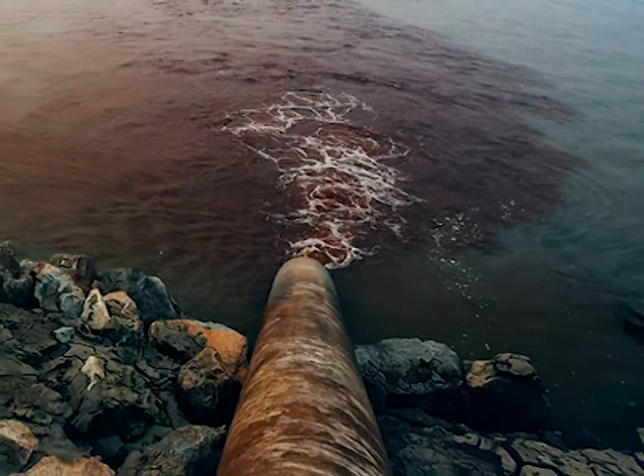Cheated? Please cool down, mother, and explain us in detail. See the condition of mine. You have taken out all my precious jewelries and spent all of them only on development of yours and had never cared to return me the same. Do you call it development by creating air and water pollution? Do you know the side effects of such pollution?

Wait, my son, I will tell you a fact. There are many consultants, experts, and learned humans who take the responsibility to control water pollution and build up an effluent treatment plant. But while selecting the machineries, they never evaluate the systems properly and the manufacturers fool them. Fool us? Can you please explain us in detail? Sure, my son. Now we will take the example of ETP.

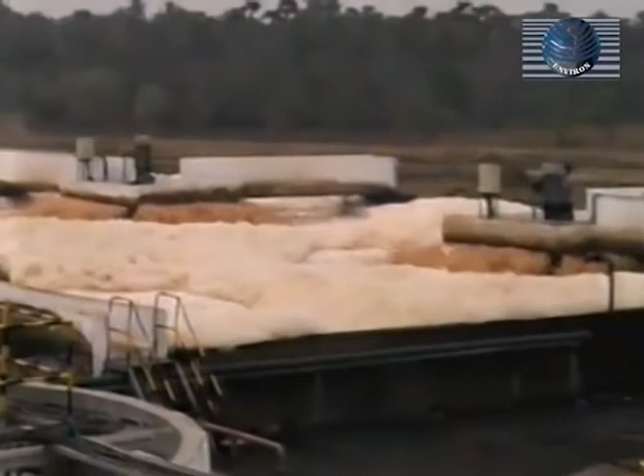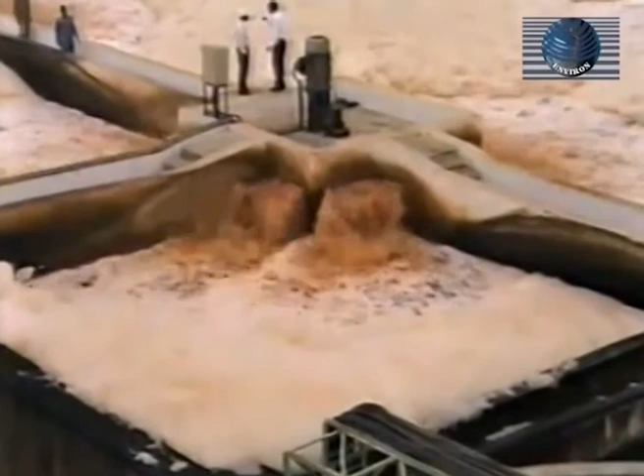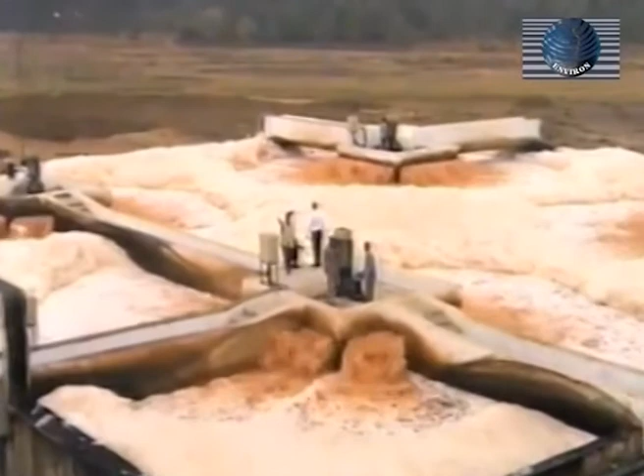In this ETP, most of the energy is consumed in the aeration system. That is, about 80 to 90% of the total energy is consumed in this system. So, while evaluating aeration systems, a total performance and cost of operation analysis is critical. The components of this analysis should include an evaluation of the initial capital cost of system installation, all operating and energy costs, and projected maintenance costs. Also included should be an analysis of how well the systems perform the 4 basic functions required of all aerators.

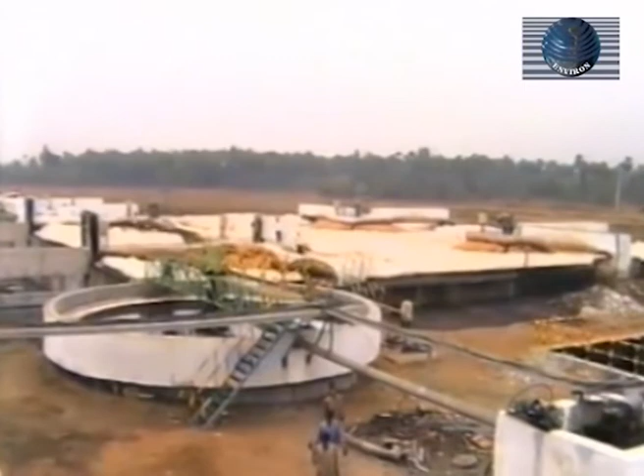First, provide sufficient oxygen transfer to promote biological treatment. Second, provide sufficient mixing to ensure homogeneity of mixed liquor suspended solids and to prevent solids settling. Third, respond to varying process conditions to maximize energy efficiency. And fourth, provide reliable service without costly maintenance and downtime and without reduction in oxygen transfer capability.

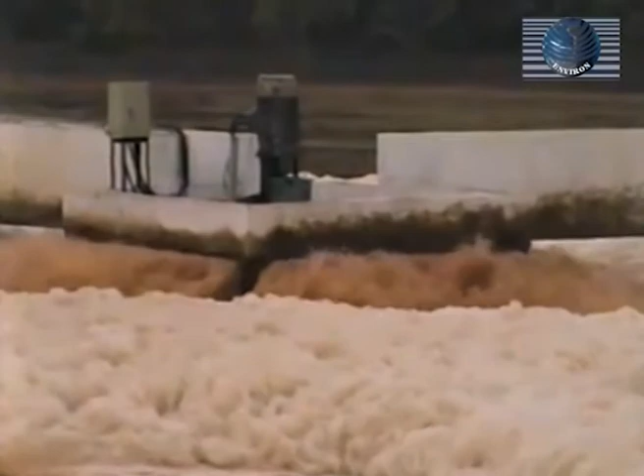Now it is time to think and to know that in any biological aeration system, apart from oxygen transfer, mixing criteria is equally important and it is a must. In any aeration system, having any type of effluent, the outlet results cannot be achieved if the mixing efficiency is missing, which most of the manufacturers and consultants fail in considering.

Oh, Mother, this is really interesting, and thanks for providing us the knowledge to evaluate this system. Wait, my son. It seems you are in a hurry. I will explain you in detail. There are mainly two types of aeration systems, that is diffused and mechanical aeration systems. We know, Mother. But by installing a diffused aeration system, we don't get the output results. Can you please explain us in detail?

Sure, my son. A detailed evaluation will quickly reveal that diffused aeration systems are able to perform only one basic function reasonably well. Diffused aeration systems have gained popularity based on only one aspect of their performance. They provide high oxygen transfer efficiencies in clean water. But the wastewater is not clean. A fine bubble diffused system which performs efficiently in clean water instantly becomes less efficient in wastewater.

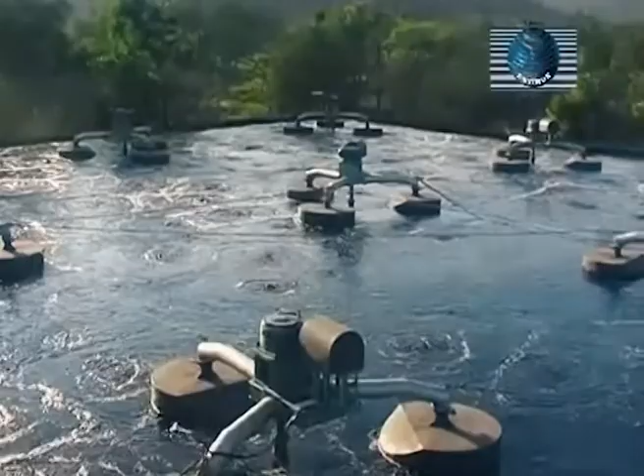Over a few months or so, the degrading of oxygen transfer efficiency becomes more pronounced until eventually the diffuser's porous membranes will need to be cleaned manually. This is an undesirable and time-consuming maintenance operation. Secondly, mixing criteria is missing. It is almost nil in a diffused aeration system.

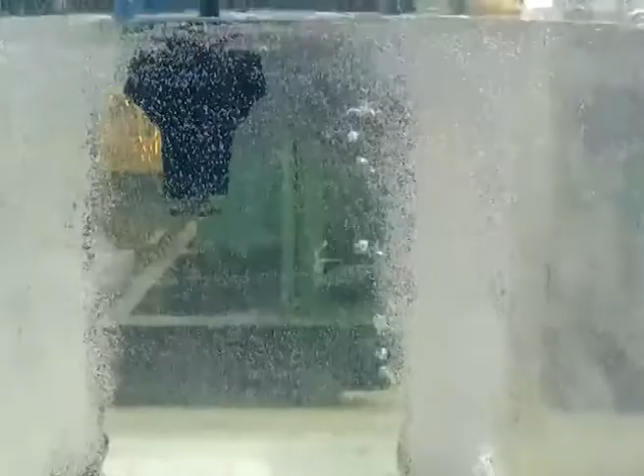Missing of mixing efficiency is the only reason of not achieving the results in diffused aeration system. And as per our experience, it's not at all possible to achieve the required results in diffused aeration system.

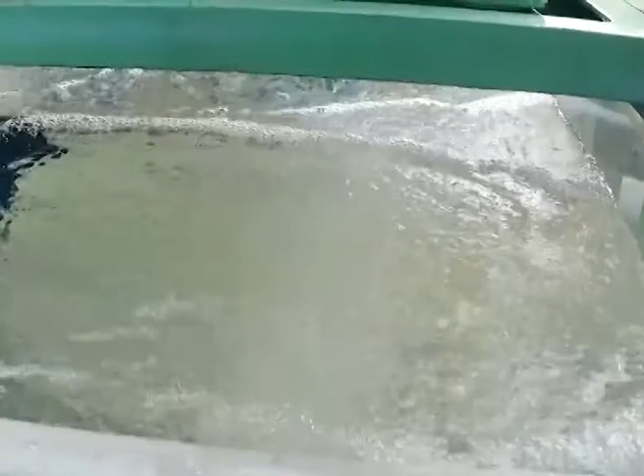Now, looking to the maintenance and operational part in diffused aeration system, the main function of the blowers is only to blow the air. But in aeration system, the continuous water pressure is always there on diffusers, which is transferred to the blowers, due to which the life of the blowers is reduced and hence high maintenance, and also more energy is consumed to blow the air due to water pressure.

Secondly, due to high water pressure, the blowers blow hot air at about 75 to 90 degrees, due to which the heat is transferred to the effluent. Hence, oxygen transfer efficiency is also reduced. So, it can be concluded that the application of the blowers is not at all suitable for aeration system.

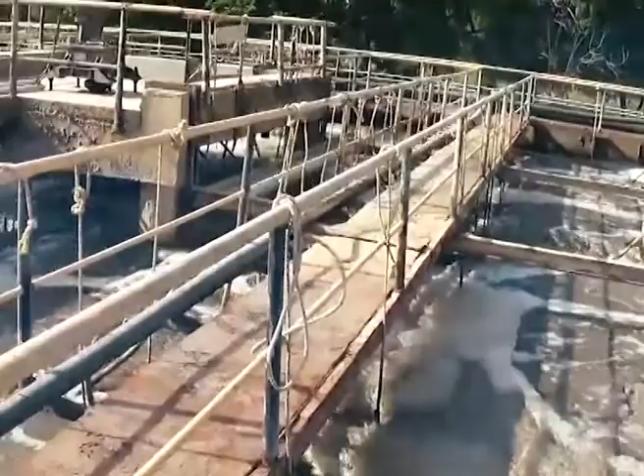The distribution of air is also not equal in diffused aeration system. So, variation in results in all the four corners at the bottom of aeration tank is observed. Secondly, standby blowers are also required, hence more capital investment. The considered life of the diffusers is 1.5 years to 2 years, and after a period of time, replacement of the diffusers is required. Hence, high replacement cost.

Special mechanics are required for maintenance of the blowers and they attend the same on chargeable basis. So, high maintenance cost. Noise level of the blowers is very high in diffused aeration system. So, Mother, can we conclude that even after investing large amount of capital spending on replacement, maintenance and also consuming more energy, the diffused aeration fails in offering results only due to missing of mixing efficiency?

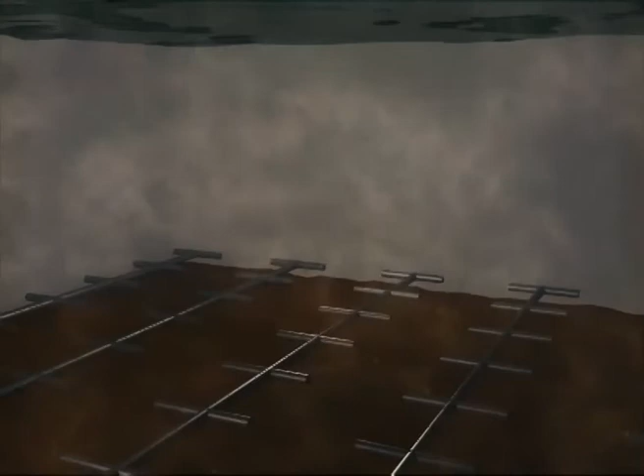The industries which are facing the problems of not getting the results can check the settlement of the sludge at the floor level of aeration tank. I strongly don't recommend diffused aeration system as it never offers the required results after a period of 6 to 8 months of its installation in aeration system. Secondly, the blowers are not meant for aeration system. Even though they supply the same for the sake of monetary benefits, as it is in human nature.

So mother, you want to say that the mechanical aerators are really suitable for aeration system? Yes, my son. But mother, we have seen and observed that they also fail in many industries. Can you please explain us why? You know, there are many manufacturers of mechanical aerators who have their own design of impeller for each and every model. To discuss, let's take an example of 25 HP aerator.

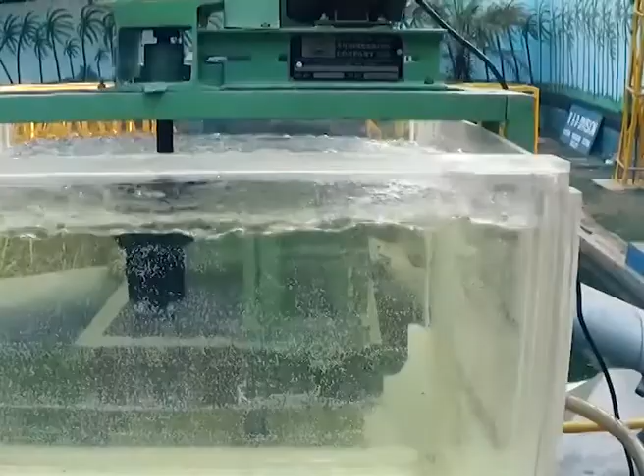As discussed earlier, the criteria of mixing efficiency and water pressure. The water pressure does not allow the aerator impeller to lift the sludge, as the impeller has its own limitations to offer the performance up to the depth of 2 meters to 2.25 meters. So, after 2.25 meters, the sludge starts depositing at the floor level of the aeration tank. So, it creates septic condition, and due to which the dissolved oxygen DO level reduces and sometimes the DO level goes down to zero.

However, even after knowing such conditions, the manufacturer supplies the same aerator having only one design impeller in aeration tank having 2.5 to 3 meters and even for 5 meters depth, as it is the nature of all human beings only to make money. The industries which are facing the problem in aeration system having mechanical aerators can check the settlement of sludge at all the four corners of the aeration tank. So it can be concluded that missing of mixing criteria due to water pressure is observed in mechanical aeration system and the mechanical aeration system fails.

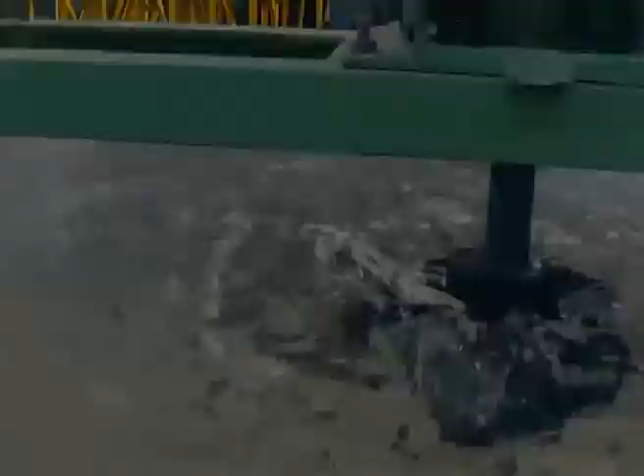Oh mother, now we understand the whole system. But mother, what is the solution of this, if we want to achieve the results in aeration system with minimum energy consumption? Nice question, my son. I will show you a company which is in India. Please listen what they want to say and how they work for the development of the nation and preventing global warming.

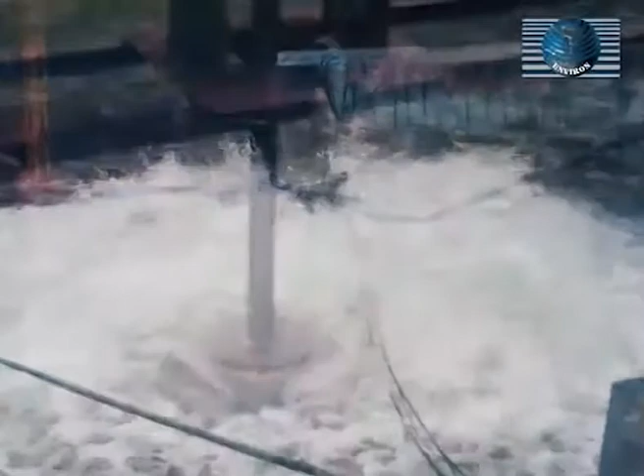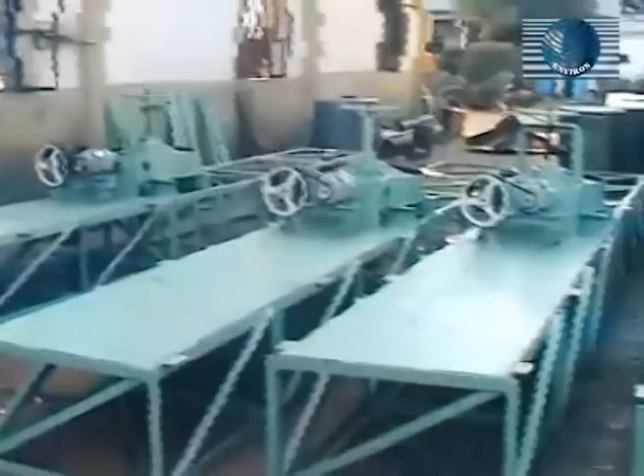We introduce ourselves as the manufacturers of the effluent treatment and sewerage treatment plant machineries like energy efficient surface aerators, fixed and floating type up to 150 HP ratings, clarifiers, clariflocculators, high rate solid contact clarifiers, HRSCC, thickeners, flash mixers, stirrers, flocculators, agitators, API type oil separators, etc.

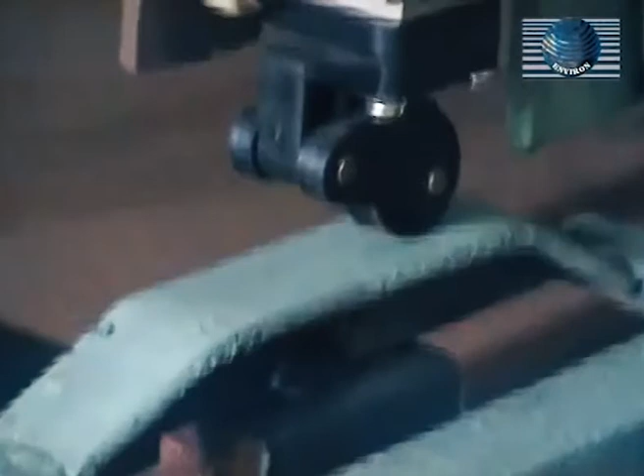The company was formed in the year 1979 by our late Mr. C.B. Thakur. His vision was to introduce new concepts in the machineries with minimum energy consumption in the field of ETP, STP, creating clean environment, and to be a part in development of our nation by reducing energy consumption and preventing global warming.

Also, having the mission to solve the problems of the industries by designing and manufacturing machineries of high quality, long-lasting, trouble-free, result-oriented and energy-efficient equipments, and also to save the large amount of energy with monetary saving in existing plants. Presently, our team are continuously working and proceeding with the same vision and mission.

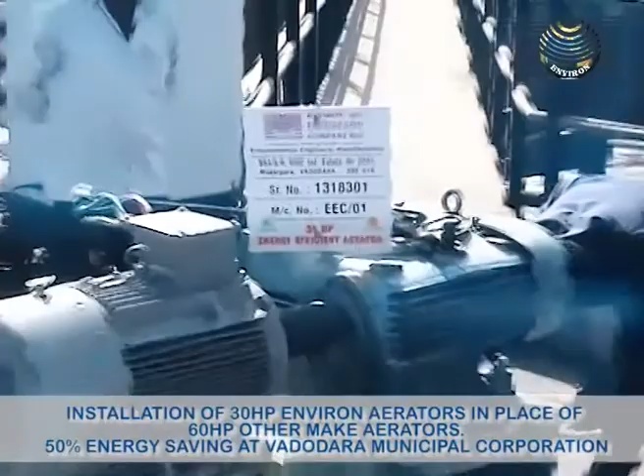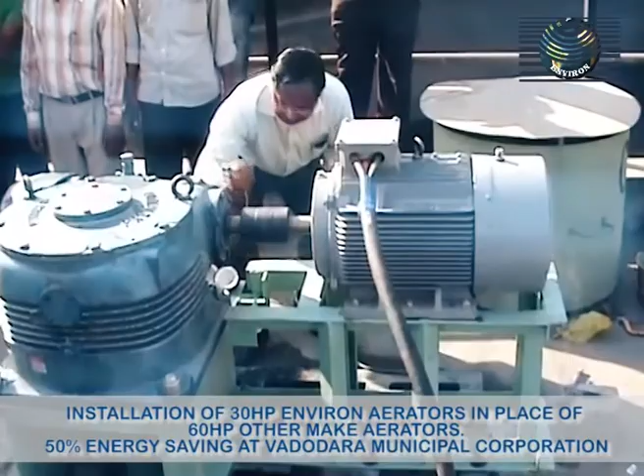We have served many industries throughout India and abroad by installing our equipments offering output results in their effluent and sewerage treatment plant. We have treated almost all type of effluent in the field of effluent treatment plant. As per our experience, in many cases we have observed that most of the industries are facing problems of not achieving output results, even after making large amount of capital investment in their plants.

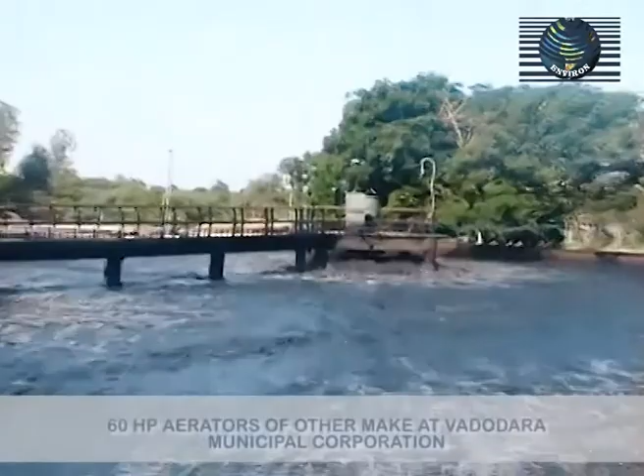Now, the question arises, why the results are not achieved? The reason is the selection of the equipments. In effluent and sewerage treatment plant, the value of the equipment in monetary terms is very less, say about 5 to 15% of the total value. But it plays very important role in offering the results, as it is only the equipment who has to take care and work efficiently to prove the performance.

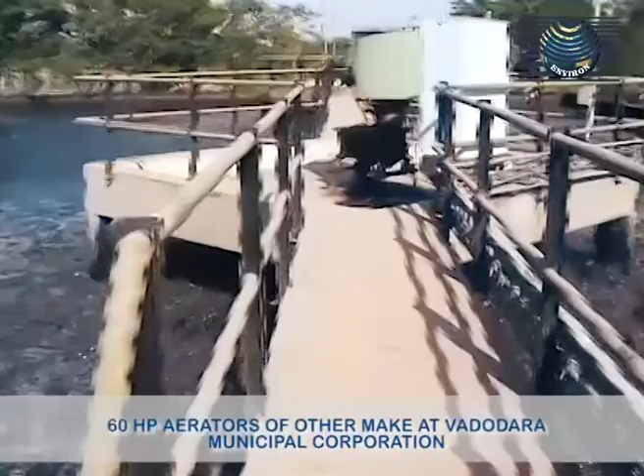So, while deciding the selection of machineries, the management of the industry at the initial stage should keep personal attention while deciding for the equipments. We have also noticed that most of the problems are faced in aeration system of not achieving the result. Environ introduces new generation of energy-efficient aerators.

Environ, having its R&D since its inception, are continuously working to increase the oxygen transfer rate along with high mixing efficiency of mechanical aerators and having developed an energy-efficient aerator which can offer the results up to 6 meters water depth with minimum energy consumption. None of the aeration system in India can offer the results up to 6 meters water depth with minimum energy consumption.

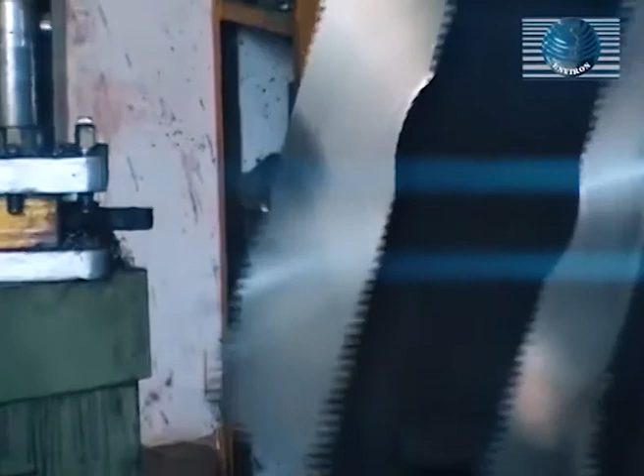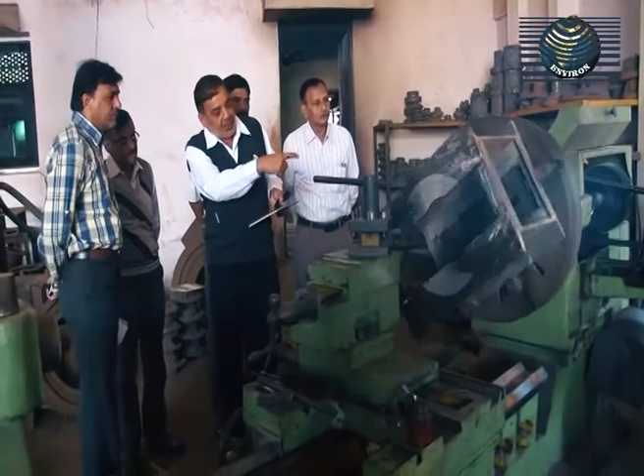Environ aerators are offered with unique features having: first, fabricated and machined base frame for 5 HP to 15 HP, and for 20 HP and above ratings, heavy ISMB beam base is provided. So, vibrations are lessened and again the base is machined on the top surface on heavy-duty lathe, so the life of the gearbox is increased. We are the only manufacturers in India to provide this feature.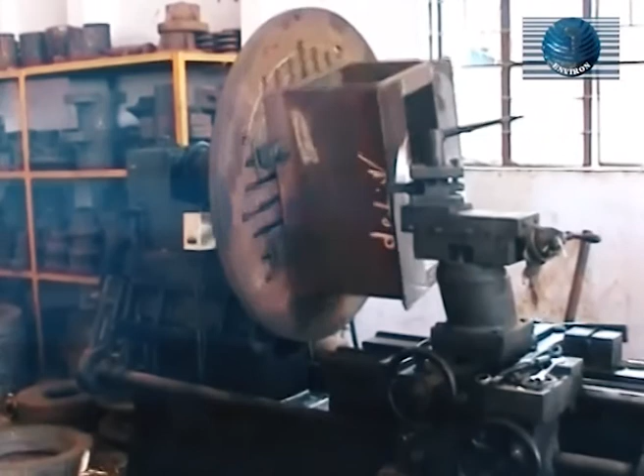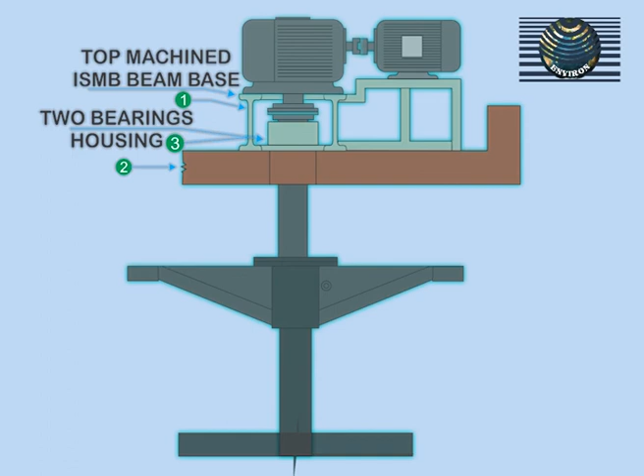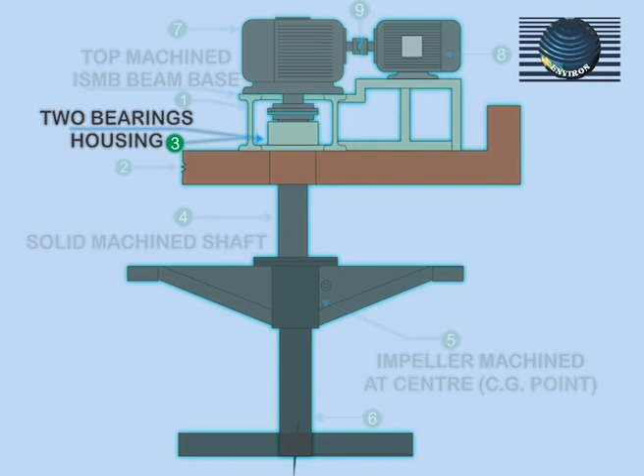Second, cantilevered load reaction is passed through additional bearings and housing to bottom of the beam base and to RCC platform. So, gear is not at all affected by overhung load, hence, life of the gearbox is increased. Third, additional bearing support is provided to the aerator shaft, so the unbalanced cantilevered loads are not passed to the output shaft of the gearbox, but those loads are taken by 2 extra bearings provided with housing. So, life of the gearbox is increased. No other manufacturers in India are providing this feature.

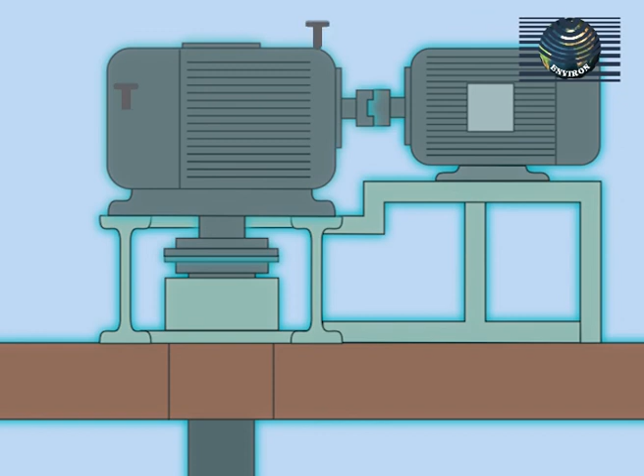Secondly, the maintenance of the gearbox is also very easy. Just loosen the 4 bolts of gearbox, 6 bolts of coupling, and then one can take out the gearbox.

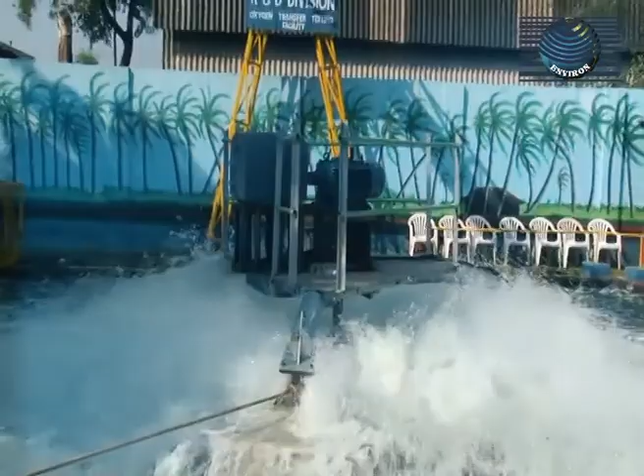Fourth, amply designed MS fully machined solid shaft to take care of heavy cantilevered, unbalanced and torsional loads supported on 2 numbers heavy-duty anti-friction bearings housed in heavy-duty cast iron bearing housing. Since shaft is fully machined, no possibility of wobbling of shaft, concentric running of impeller is ensured. No other manufacturer in India are providing this feature. Tubular shaft in aerators with helical gears are provided.

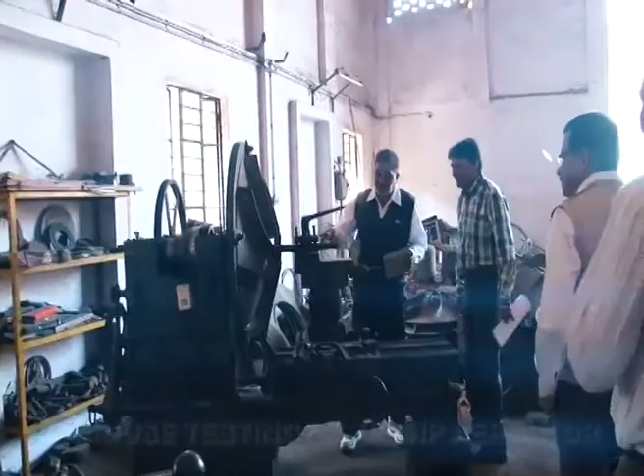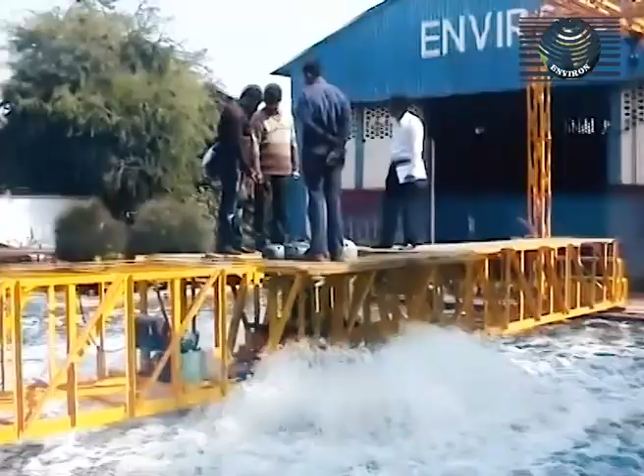Fifth, the impeller is designed as a single shrouded pump impeller to achieve maximum oxygen transfer and mixing efficiency. Being a semi-open type impeller, it has a very valuable feature of self-cleaning. Hence, practically zero maintenance is required for the impeller. Secondly, due to the conical impeller and solid MS shaft, the CG lies nearer to the center, so there is less impact loading.

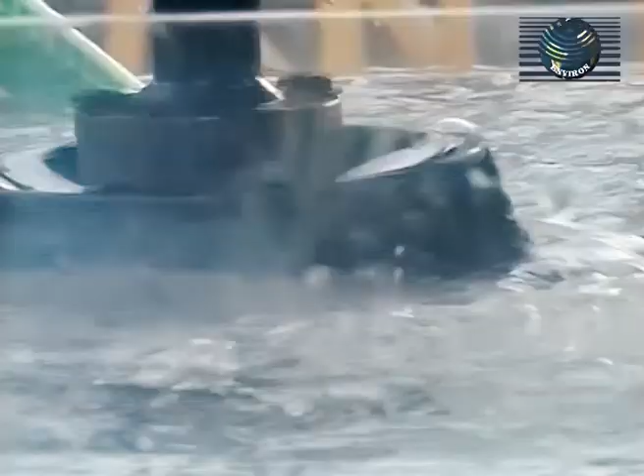Sixth, the new generation of Environ energy efficient aerators has the special unique feature of an additional impeller at the bottom for efficient mixing at the floor level of the aeration tank, with tank water depth up to 6 meters, due to which the oxygen transfer efficiency of the impeller is increased and hence with lesser HP more oxygen transfer is achieved.

Secondly, less area is required due to the water depth of 6 meters, so civil construction cost and the space required will be less, hence economical. It avoids settlement of sludge at the floor level up to 6 meters water depth.

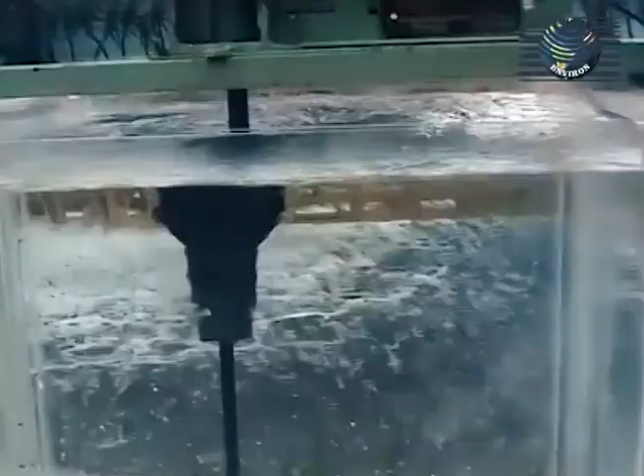Seventh, the life of this aerator is about 12 to 15 years. No variation of results in all the 4 corners of the aeration system till its life is ensured due to efficient mixing. Secondly, the maintenance is also minimal, almost nil in this aerator.

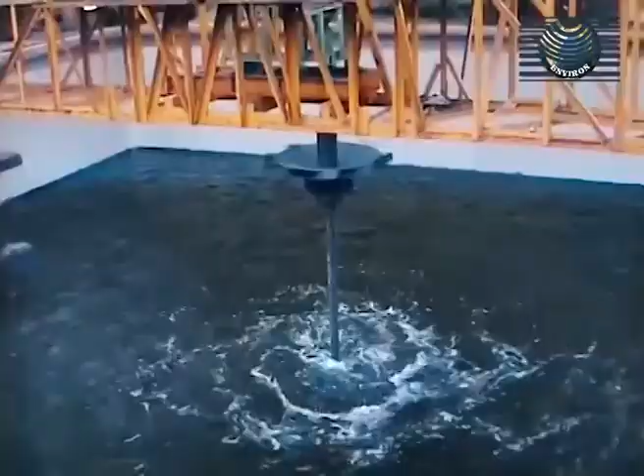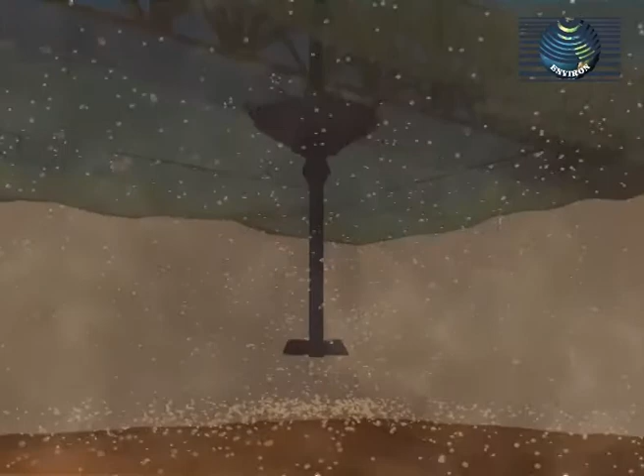The working of the Environ energy efficient aerator is like this: the top impeller has very high oxygen transfer capacity and the bottom impeller is provided for rigorous mixing. By providing the additional impeller, a vortex is created at the bottom, which breaks the pressure of the effluent and does not allow the sludge to settle at the bottom floor level of the aeration tank.

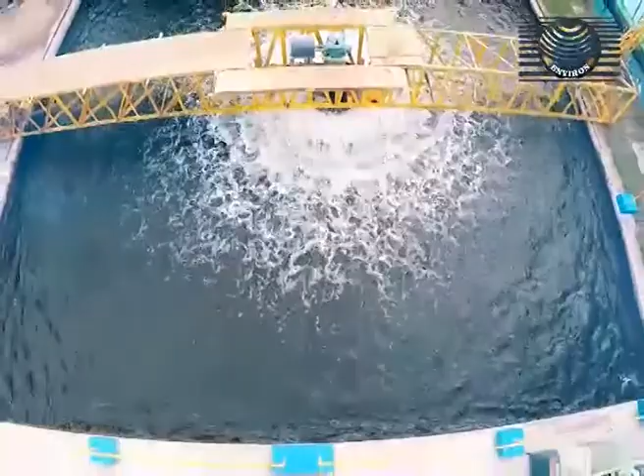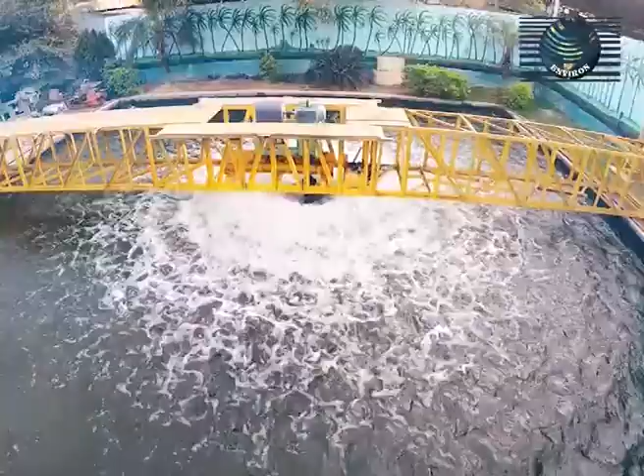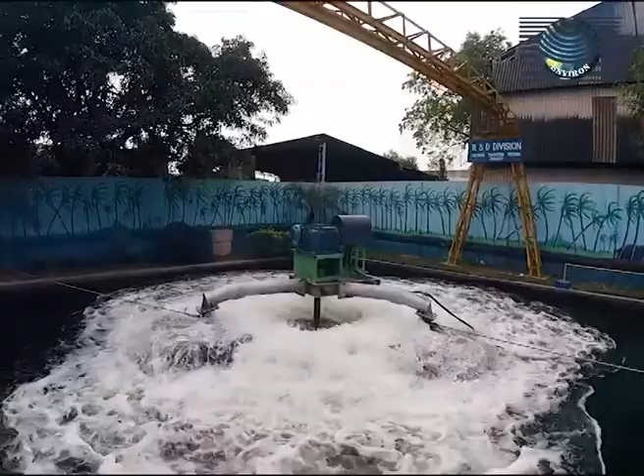It is very simple to understand that due to rigorous mixing, the solubility of oxygen is more. So, oxygen transfer efficiency is increased with less energy consumption compared to other aeration systems, hence energy saving. Environ also accepts the challenge to reduce minimum 20% to maximum 70% energy in any existing aeration system having water depth up to 6 meters.

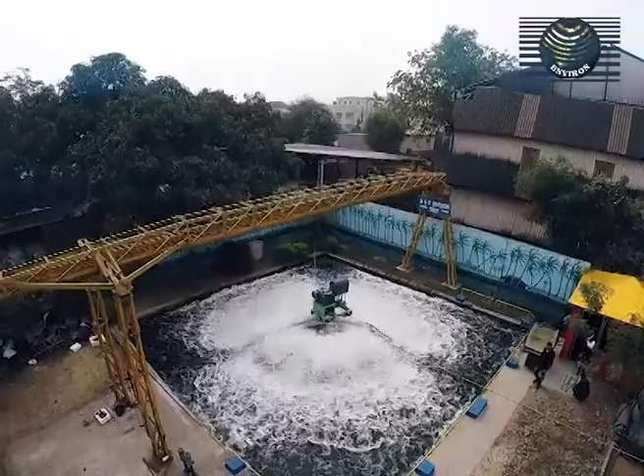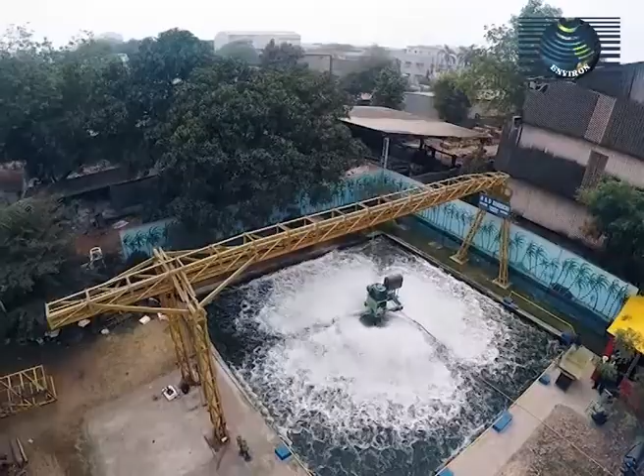Till date, that is up to February 2015, we have saved 1100 kilowatt energy amounting to Rs 7 crores in about 18 industries by replacing other make aeration systems with our energy efficient aerators, offering guaranteed results in aeration systems.

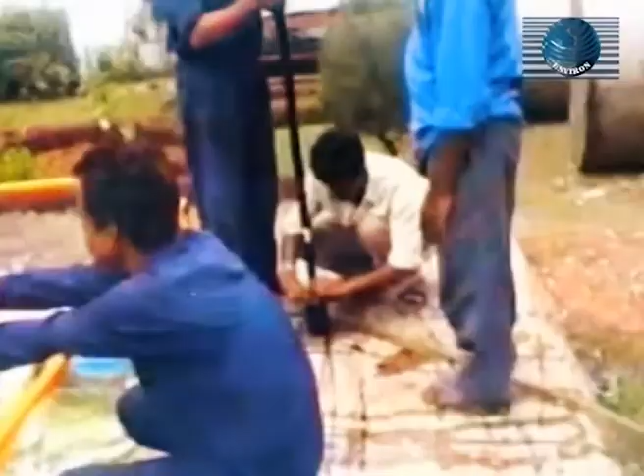We are the only manufacturer in India having an oxygen transfer testing facility, where our team is continuously working on upgrading the efficiency of the aerators, offering more oxygen transfer and efficient mixing with minimum energy consumption, and can save more energy in existing aeration systems and also in new upcoming projects.

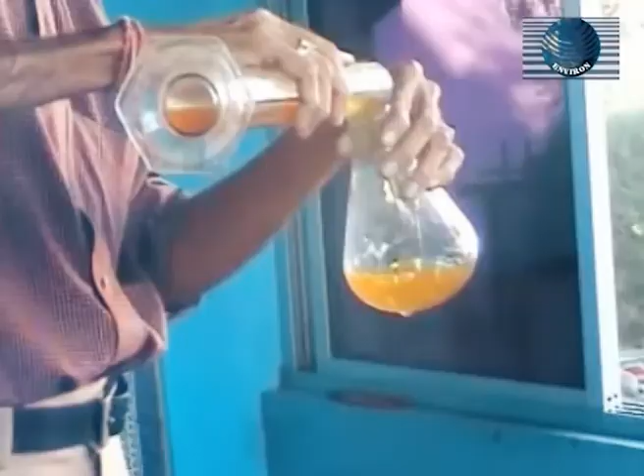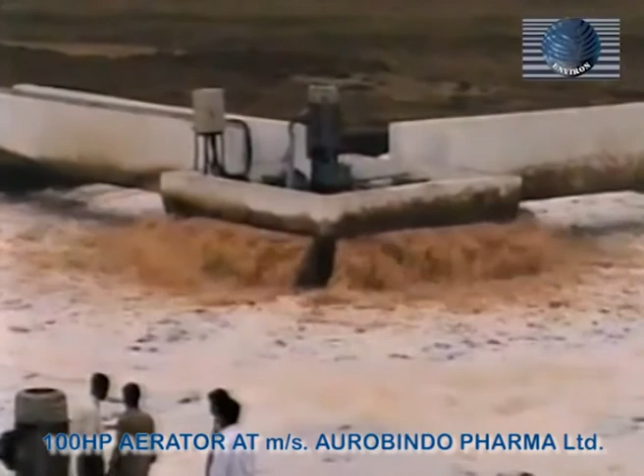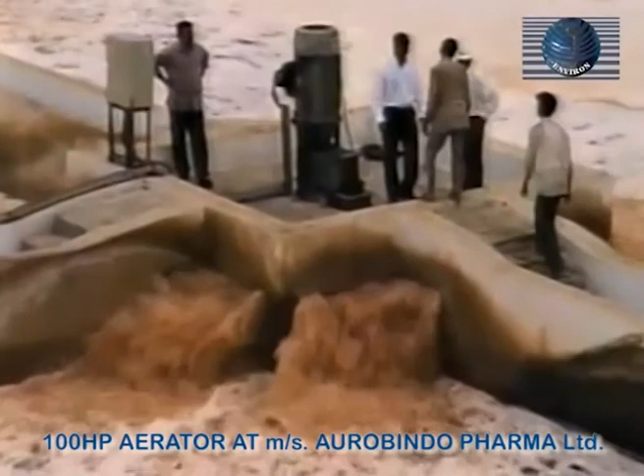Environ firmly believes that by saving energy we are a part in the development of our nation and also in preventing global warming. We are also proud to be first in India to design, develop, manufacture, supply and commission a 100 HP aerator at Messrs. Aurobindo Pharma Limited for their Vizag plant, and are also thankful to them for giving us 30 times repeated orders by installing our equipment in their plants throughout Andhra Pradesh.

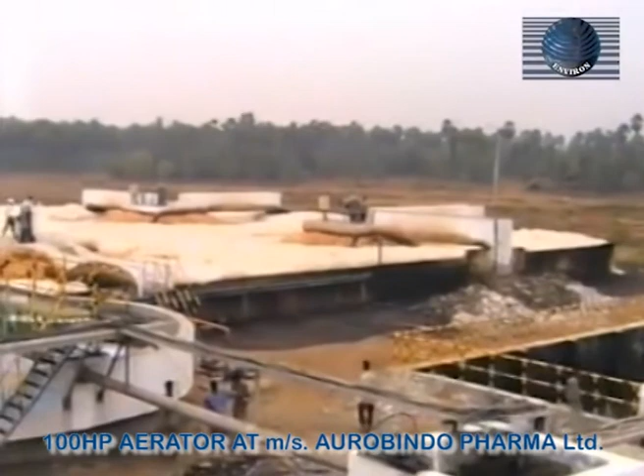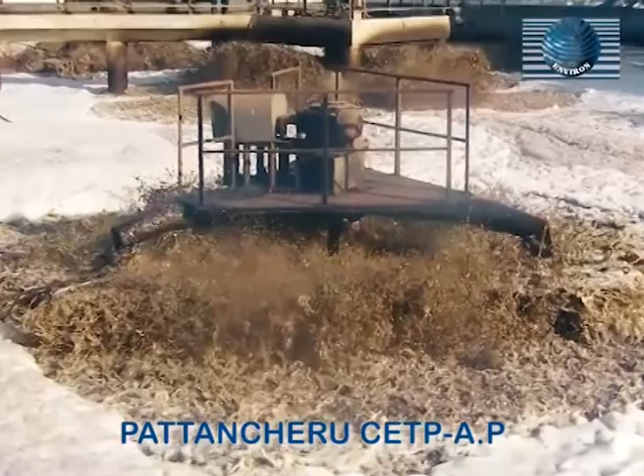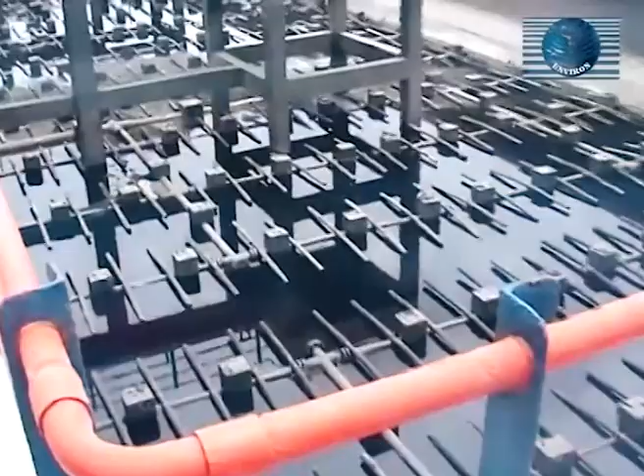Till date, we have installed our equipment in 13 major CETPs of India. We are also thankful to our 166 valued clients who have given us an opportunity to serve repeatedly for each and every expansion, and also to all our clients who have appreciated, installed our equipment and supported us, and also been a part in continuing to fulfill our vision and mission.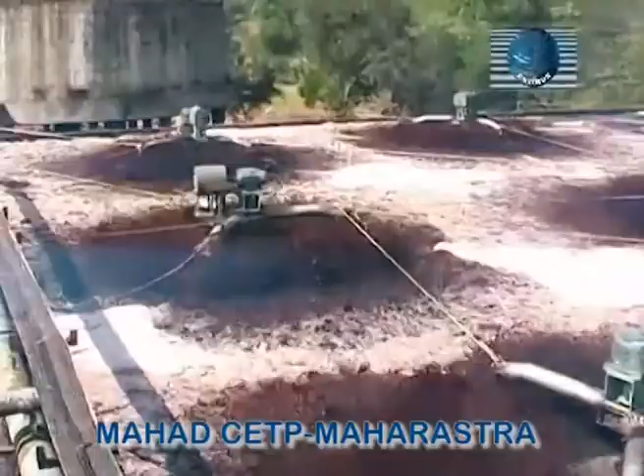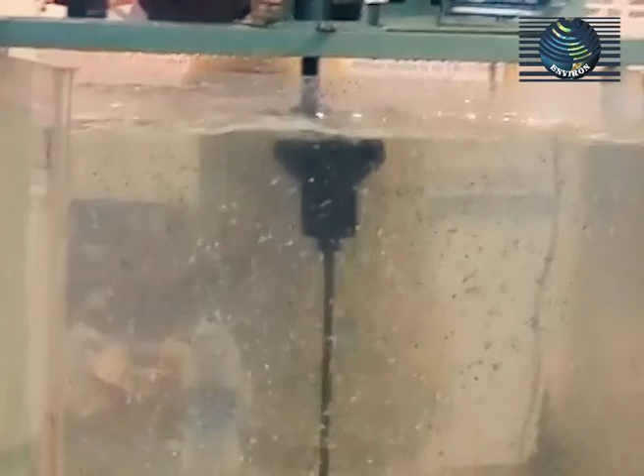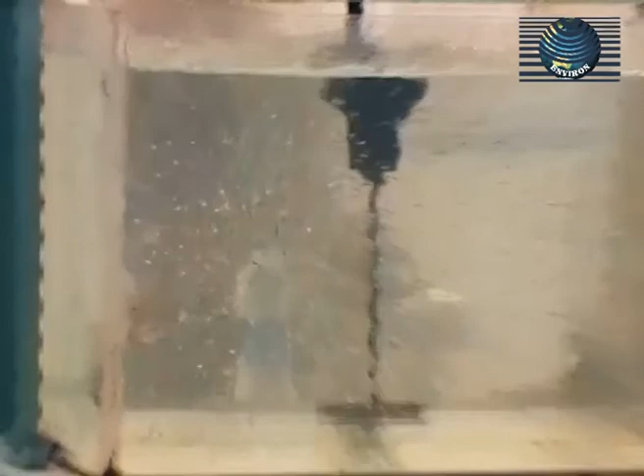At last, it is our request to all who are serving in this field not to miss the mixing criteria when evaluating an aeration system, which is the most important part of this system. As we have been in this field since 1979, it is our responsibility to share our experience for taking the right decision by the industries and consultants in selecting the equipment before installing the machinery for achieving the results. We strongly believe that environment is a gift of nature and it is our responsibility to protect it.

Now, you have seen the activities of Environ. But I forgot to tell you that they have planted about 3,500 trees in their area at Makarpura and its surroundings, trying to heal my wounds by creating nature. Oh, I'm impressed to know and watch this. I will definitely recommend Environ equipment to save energy and achieve the results. Thanks, Mother. Please bless us.